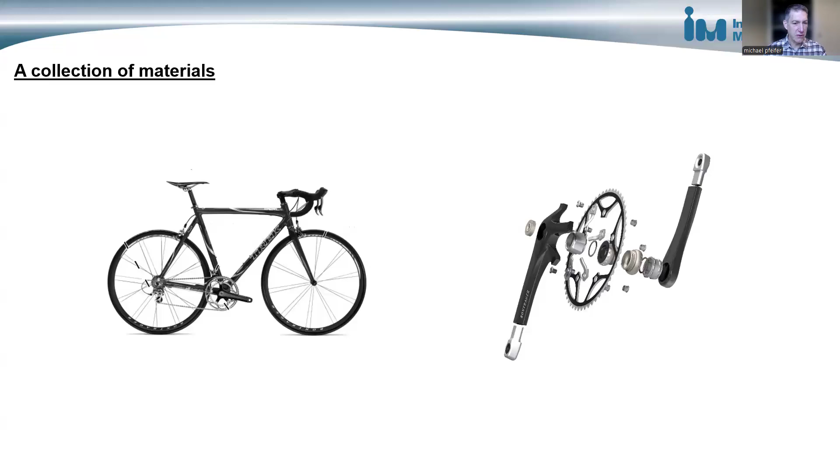So I'm going to be talking about how materials engineering can be used to contribute to reducing the costs of products, and in many cases this is also helping to prevent problems that result in higher costs than necessary.

So the cost to produce a product is related to three things, basically, if we're talking about just direct costs. And that is the components that are used in the product. These are the materials in the components, the fabrication methods that are used to make the components, whether it's machining or casting or extruding, and also ease of fabrication. When it's easy to fabricate components, then the costs are lower, and when it's difficult to fabricate components, then the costs are higher.

There's also the assembly, the processes that are used to assemble parts together, whether it's welding or soldering or brazing, and also ease of assembly. And finally, there's quality problems. This can be both problems with supplier quality or internal production quality. In either case, when quality problems come up, then there's scrap and rework and other things going on that cost money. And so there are things that can be done to either prevent the problems from occurring or to quickly solve the problems so that the costs associated with quality problems are as low as possible.

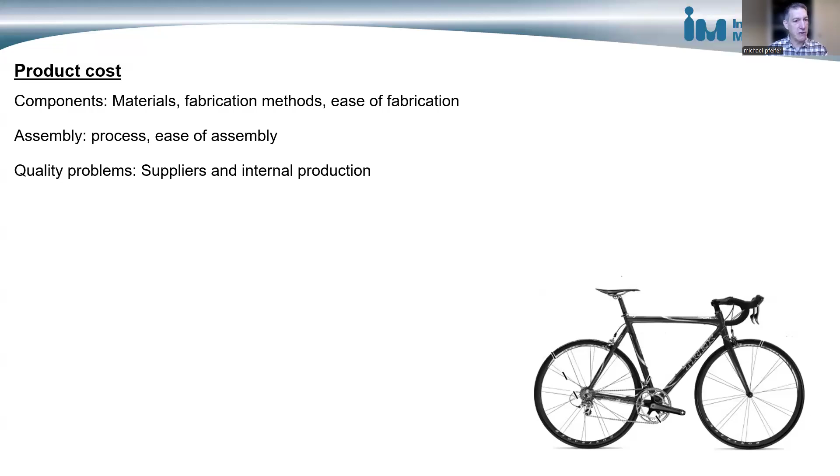So for reducing component costs, there are a number of different things that can be done. The first is to identify lower cost materials that meet the design requirements. So the first thing that needs to be done is to understand what are the different design requirements, what are the performance and reliability requirements, how will the components be fabricated, how will they be joined together, are there weight requirements or size and shape requirements.

So quite often there are lower cost materials that are available to meet the requirements. In many cases, for a particular design, for a particular product, people are comfortable with certain materials, or certain materials have been used in past products, and people want to continue using those materials, even though other materials might be available that provide the performance and reliability at lower cost. So it could be, and some things may be like eliminating secondary processing.

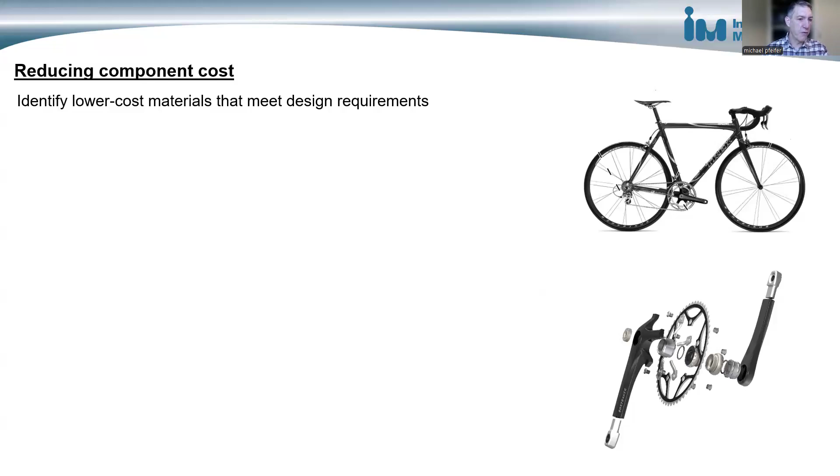Also, do the materials that are being used provide more performance and reliability than needed, and are there lower cost materials that still provide the reliability and performance needed, but not as high as the materials that are currently being used? So you're paying more for the materials that provide more performance and reliability than necessary, and maybe a lower cost material is available that still meets the requirements. And finally, maybe using coatings as a way to use a lower cost material but still give the properties that using a higher cost material is currently providing.

Then there's also using a different fabrication method. So some fabrication methods are more expensive than others to use, whether you're using machining or extruding or forging. And perhaps it's possible to, rather than machining a component, to cast the component, having a near net shape component that might just need a little bit of machining after casting. And so that would also require using a different material, but we can select a material that still enables meeting the performance and reliability requirements.

So machining bar versus casting, trying to eliminate secondary processes where possible. So maybe eliminating a heat treatment, or applying a coating, or eliminating extra machining after the part has been fabricated. And the final thing is ease of fabrication, and this is a big thing. Ease of fabrication refers to how easy it is to fabricate a component into the shape that's desired from the materials that have been specified.

So if the part is being made by a supplier, then you're concerned about the cost per part, the cost per piece. And if you're fabricating a part internally, you're concerned about the cost of scrap, rework, extra inspection, extra WIP, basically any hassles associated with fabricating the part.

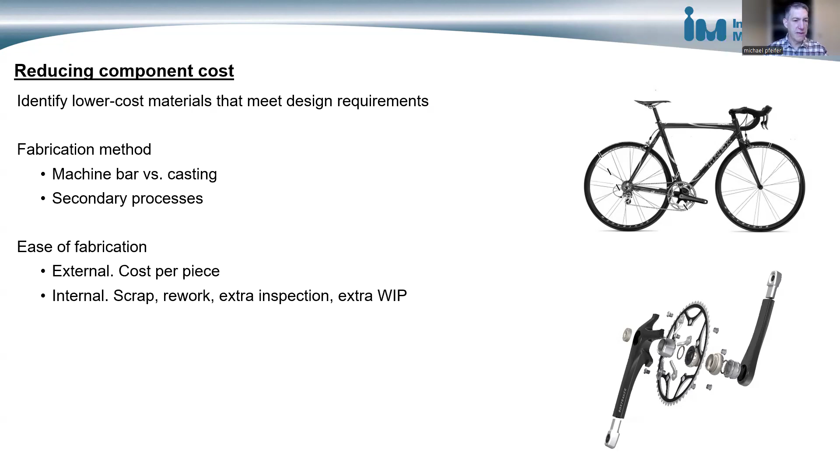In terms of having a part fabricated externally, some of you may be familiar with sending a drawing out to a supplier and having them provide a quote that you might think is higher than expected, or they might even no quote a part. The reason for the high cost or the no quote is that the supplier recognizes that the part is going to be a hassle to fabricate, and they don't want to deal with it, or they're going to charge you for it. And so designing for ease of fabrication is important for keeping suppliers' costs low, or to be able to get the suppliers you want.

So ease of fabrication is related to the materials that are being used, and also the shape and the form of the component. Some materials are easier to work with than other materials, and for different processes, some shapes are easier to obtain than others. So for example, with die casting, the part has to have a certain draft to it so that the part is easy to remove from a mold. But if the part isn't designed properly, then it will be a hassle to remove from the mold, and the supplier will charge you for that. Ease of fabrication also affects internal fabrication in terms of scrap, rework and extra inspection.

So design for manufacturing is important. When we're thinking about design for manufacturing, we're selecting the form and materials that improve the ease of manufacturing, and also, as I'll discuss in the part on assembly, ease of assembly. And this is done during product design.

So for example, if you're going to machine a component out of steel, you can possibly use an alloy that contains lead, and that will enable easier machining and faster machining. If you want to make 5,000 parts a week, that might be a way to go, because having lead in the steel enables faster machining.

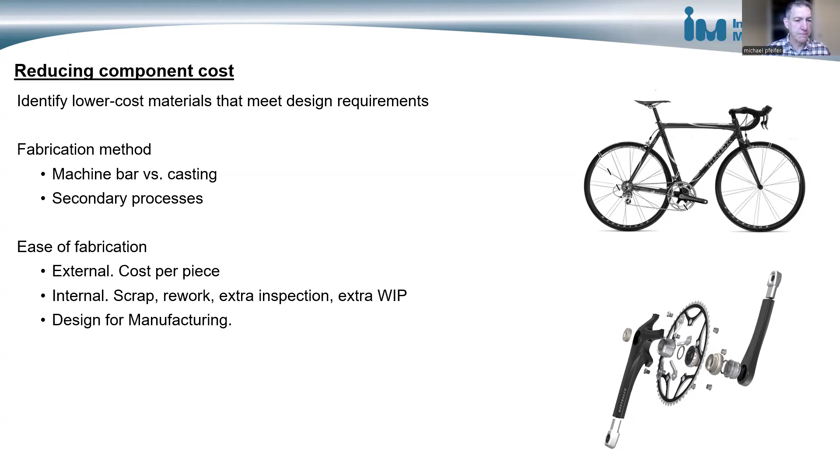For reducing assembly costs, it's the same thing. It's thinking about design for assembly, thinking about the component form and the materials that are being selected, and the joint that's being selected, whether it's a solder joint or a weld joint or a braze joint, and whether it's a butt joint or a lap joint. And selecting the materials, the shape of the components and the type of joint so that the parts are easy to join together.

Also, the assembly process that's being used is also important, and the cost of the process impacts that. So perhaps using a lower cost process will result in lower costs to make the product.

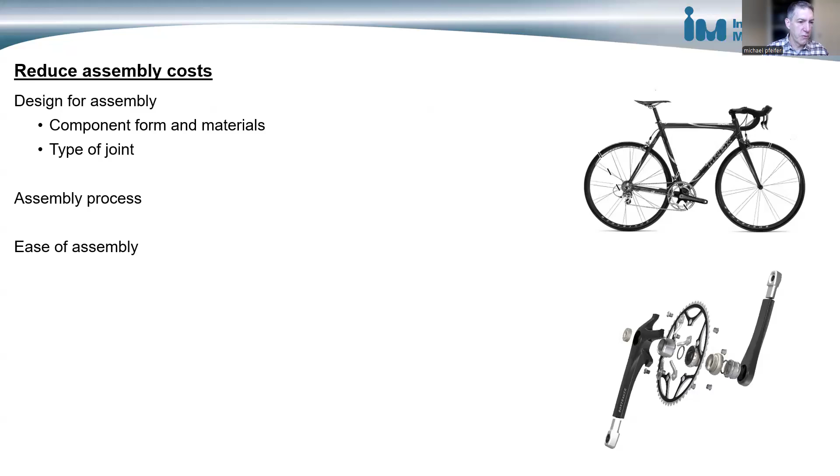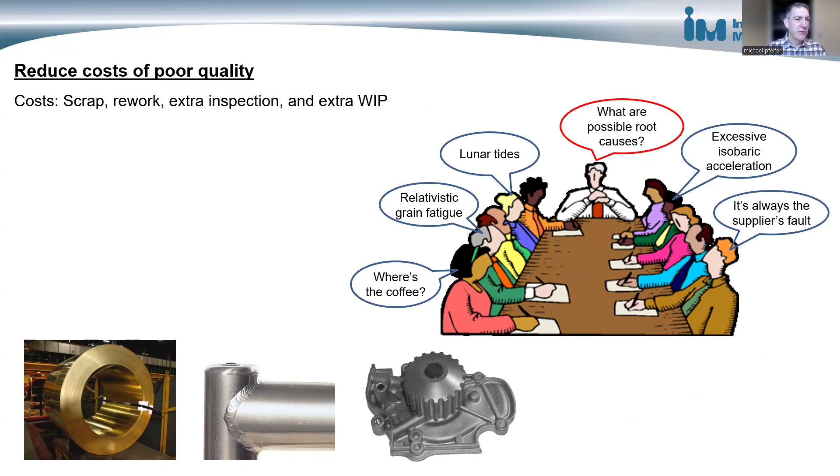And the final thing for reducing product costs is reducing costs of poor quality. Costs of poor quality come from scrap, so throwing away parts that you fabricated or product that you've produced, rework, extra inspection, and extra WIP that has to be built up because you know that there's going to be problems at some point in the process, and you have to have enough material in the line so that downstream processes can continue on. This is all a lot of cost and a lot of hassle.

The first way to reduce the cost of poor quality is to prevent the problems from occurring to begin with. So from the materials engineering perspective, we want to select materials that enable easy fabrication and assembly. We want to write thorough material specifications for the materials that are used in components so that suppliers understand what's required of them, and that your manufacturing line understands what evaluations need to be performed to evaluate the materials.

Also, we want to go through a thorough supplier evaluation process to make sure that those low-cost suppliers that are way overseas are truly capable of providing materials or components that meet your requirements, that have the properties that are needed for the application, and where manufacturing defects are kept below some maximum amount, so that the defects don't cause a problem in your product.

A lot of times supplier evaluation doesn't involve materials engineers, and so people select suppliers that don't really have the capabilities or the knowledge and the expertise to provide the materials or the components that you need. And with internal production, the way to prevent problems is to develop capable manufacturing processes

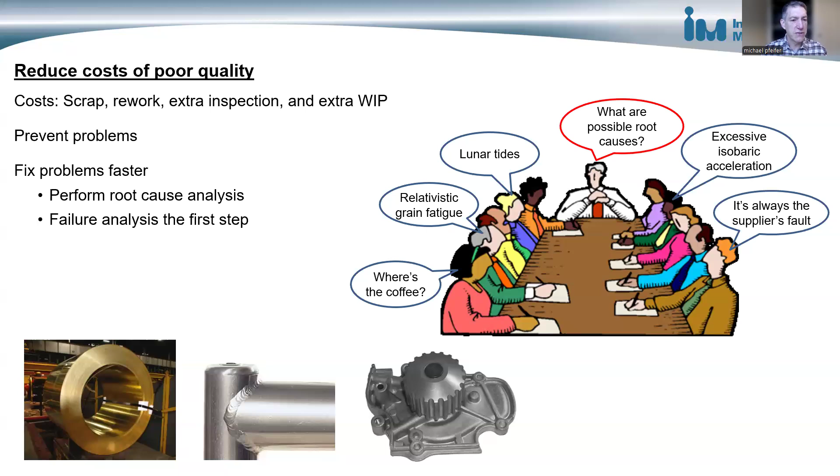Then we want to review the data and understand what it's telling us about the materials and what's happening with the materials. From this, we can identify the metallurgical reason for the problem, and from that we can narrow down the root cause of the problem, whether it's a design issue, a supplier manufacturing issue, a process issue, and so on. That helps get to the problems very quickly, and you can typically resolve problems in a matter of a few weeks once we get the information from a failure analysis.

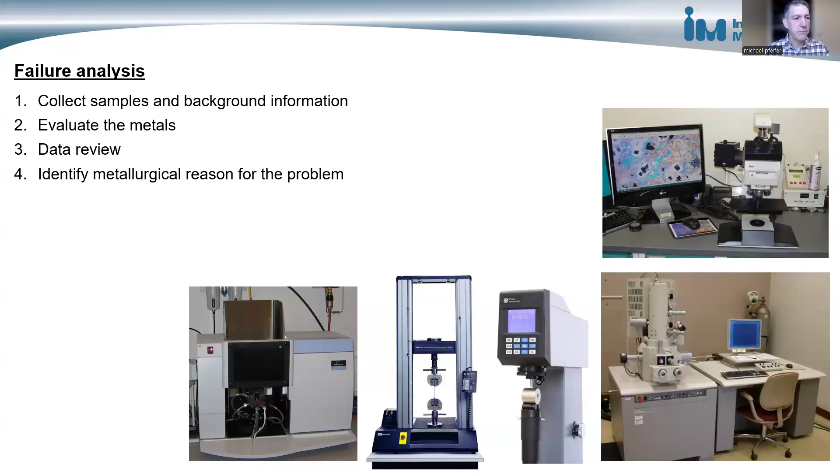So in this presentation, I explained how materials engineering can have a big impact on product design and on costs related to materials used in products, both from the design perspective as well as solving problems. The takeaway is that in many cases there's a missing piece from engineering teams, and that is metallurgy and materials engineering expertise. This never ceases to amaze me. Unfortunately, there's so much information on the internet, people think they can get the information they need from it, and sometimes it's helpful, but a lot of times it's not, and people end up making decisions based on it and don't get anywhere. What's really important is to have metallurgy and materials engineering expertise available to you, and there are a lot of people available that can help out.

And interestingly enough, some companies have materials engineers and metallurgists on staff, but people in the organization don't know to go to them for help during product design, manufacturing process development, supplier evaluation, or when problems arise. It's kind of weird. We can reduce the costs of products by engineering the materials and components, using lower cost materials, and designing for manufacturing to come up with parts that are easier to fabricate and assemble. And we can apply metallurgy and materials engineering to quickly fix quality problems.